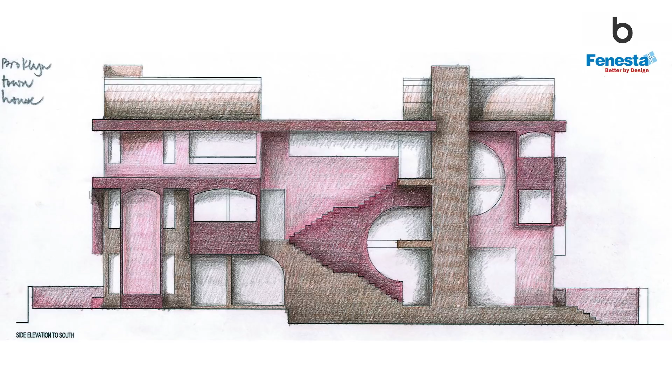So the house is located in the central part of Ahmedabad, near the western side of the river, near the village of Ambawadi. It's part of an old housing scheme for employees of Bank of Baroda. These largely consist of twin houses on long sites oriented north-south, and there are several of these lined up together.

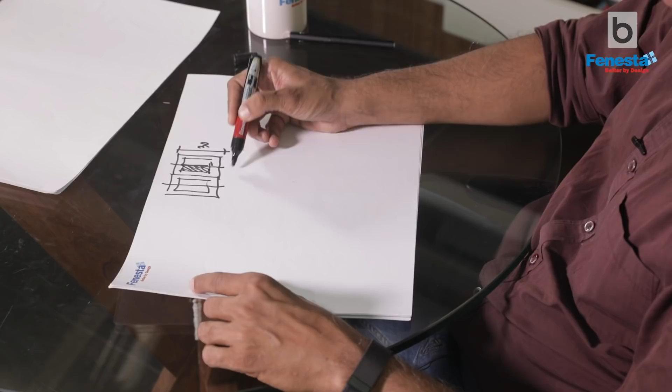The plot that we were working with is actually a west-facing plot, about 30 meters by 8.5 to 9 meters. So it's a long urban townhouse, so to say. Since the plot is west-facing, we had the added challenge of how to deal with the heat coming in from that long side.

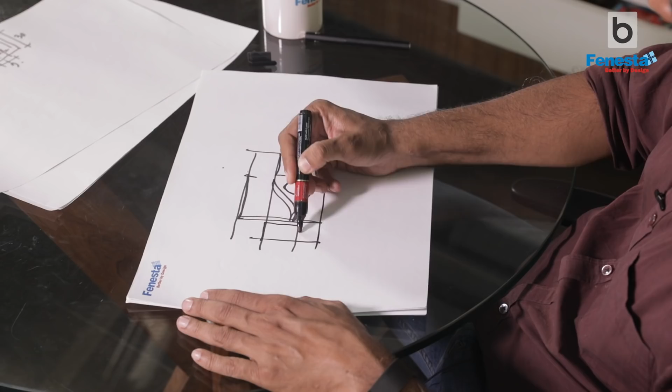So the main elevational exercise that we had to do came out of the fact that the building was going to be ground plus 2 levels, and we had to integrate the eye into it. The design of the staircase, integrated with an opening into it, was the device that we used to do this. That allowed us to look at the staircase as an element connecting across all 3 levels, and also allowed us to break up the elevation and facade of the building into areas that would cast shadow and protect it from the west side heat.

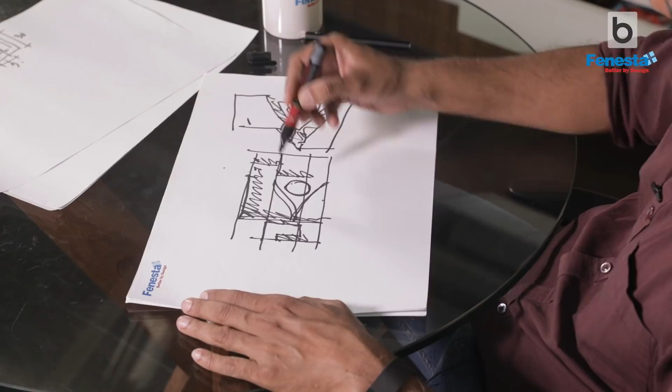The staircase, because it went up in different layers, allowed us to step the building back and create other pockets of shadow, which we then carved into to bring light into the building. This was the main elevational strategy, which structured the entire length of the west side, the main elevation of the building.

So the ground floor plan is actually north-south long in that sense. There's a forecourt into which you enter, with a space for parking of cars. The plinth actually comes up and sits five steps up, so there's a set of steps which come up this way, and steps which take you up into the margin, which is all garden over here.

You can enter through a main door here, and this is the main living room area, which has a set of folding doors allowing it to open up and sit onto this garden, which is all green with plants and so forth.

This is where the staircase is, with the eye bringing in light into the center part of the house. So this is lit—this would normally have been the darkest part of the house. This, of course, gets light from here and here. So it's the eye window, as we call it, which brings in light here.

It's a special window. Right in front of that is the picture of Satya Sai Baba, which is in some sense the puja space. In the living room, against this wall, is a kind of informal sitting area with a jhula, which is very common in Gujarati homes. It defines the living room space but also allows for visual continuity. There's an open kitchen over here, which allows you to have dining in this area.

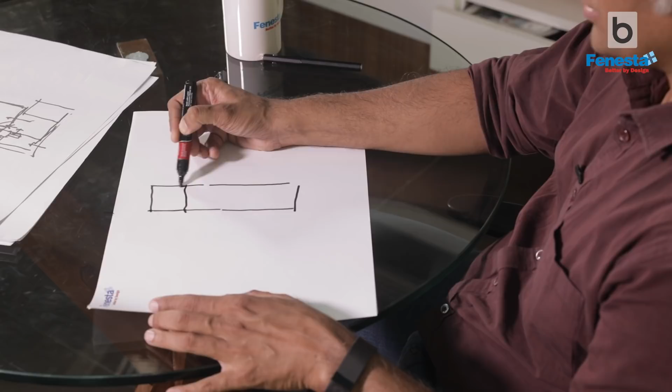So the first floor is designed both as a continuation of the house at the lower level, but also designed in case it needs to be used separately as an apartment by the son, who wants privacy. In that sense, it works as a 2-bedroom apartment at this level, with bedrooms at the north and south edge.

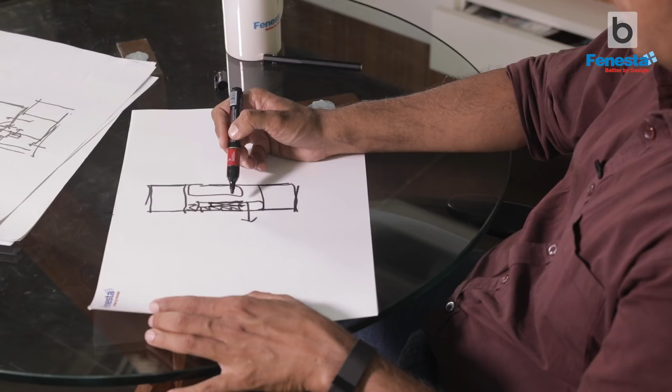At the uppermost level, it's very unusual because in order to make it lighter, we've constructed the entire house at that level in wood. This is all recycled wood from Alang, which was reused, making a very light structure with a wooden frame and simple flush doors articulated to fit into that system. Interestingly, the windows are cut out of the doors so materials are used very efficiently.

Again, there's a large room with a long toilet. Another room on this side is a bedroom, and the space in between is again a long kitchen and dining space. So each level of the house can be used both as an independent apartment or as part of one single joint family house. The idea is to allow for the imagination of a single house while also using it separately.

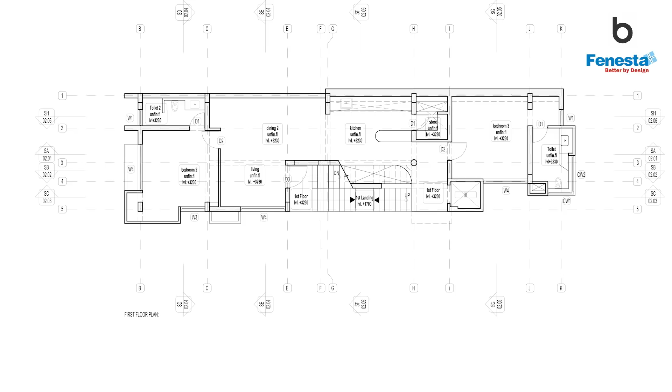Though the plan of the first floor and second floor look similar, because of the wooden structure, the space here is completely different from the lower level. The quality of light, the diffused luminosity of these spaces because of frosted glass, makes one feel it is a much lighter space, and this was part of the brief given to us.

The size of the room here is much larger. It has the possibility of working as a private space but also as a large hall when the family wants to have gatherings for bhajans and other religious meetings.

These are houses in the budget range of about 65 to 80 lakhs, and the built-up area of this house is about 3,500 square feet in total.

With a cost of that amount, if one is going to detail the building very carefully, the fees would be exorbitant, which doesn't work out for the nature of the client we're dealing with, who have very stringent budgets. So what we decided to do to facilitate this was to take up some of the construction ourselves, like a kind of design and build.

For that we started a workshop, and we took up material management and construction of the dry part of the building ourselves. We sourced the wood from Alang, brought it, and manufactured all the trussing and structural systems for the upper level, including the doors and windows, which gave us great control at a reasonable cost.

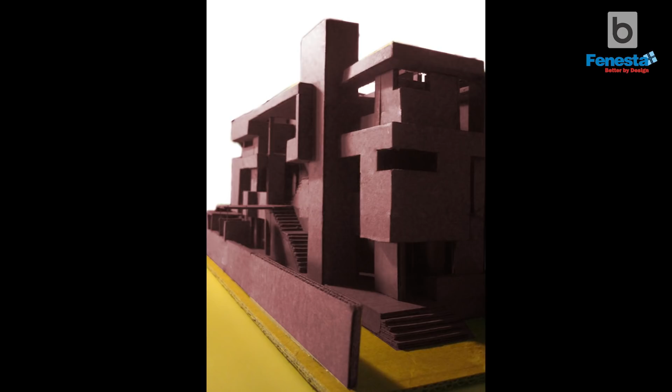The material palette of the building really came out of the fourth point that was part of the brief, which was the pink color of the building. As I mentioned, we looked at paintings to see what other colors we could use with the pink, and interestingly greens and blues came up with pink, an unusual kind of mix. We started looking at the play of both synthetic pink, what you'd get with pink paint, and natural pinks you'd find in slate stone or other natural materials, and this formed the play of the facade in terms of material.

What we did was use the greenish blue plaster to define a heavy base of the building, and then the pink color and the wood on the upper level gave a sense that the building was becoming lighter. So it followed that theme through the entire articulation of the building.